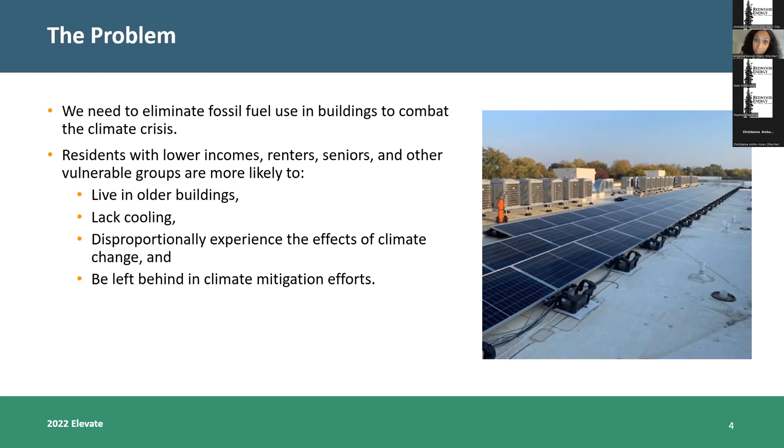As an organization, we're extremely focused on decarbonizing affordable housing, but making sure we're doing it in a way that does not increase the energy burden and increase energy poverty, quite frankly.

To do this, we developed our building electrification program about two years ago. This program provides a service delivery model for affordable housing owners to implement electrification upgrades with grant support and leveraging any available utility or public funding. The program is really designed to replace fossil fuel using equipment with cleaner technologies, create a healthier living environment, add cooling to increase resident comfort, and generate savings.

So far, we've been able to upgrade 100 units, and we have about 500 more in the pipeline.

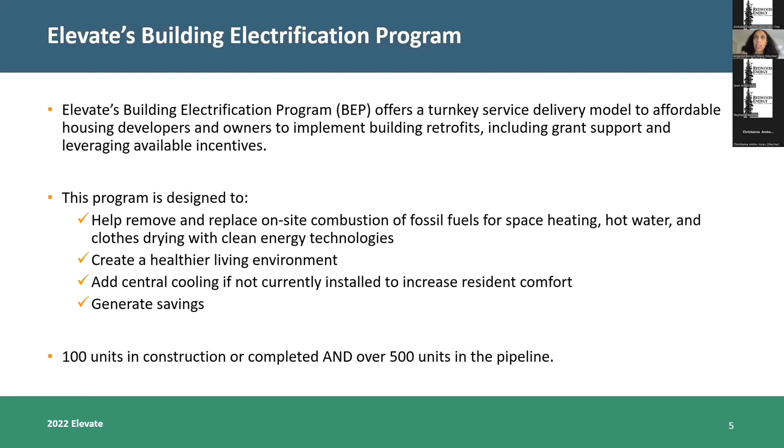This program is really about bringing together all the pieces for an affordable housing owner. Starting with our internal technical expertise at Elevate to complete the feasibility analysis and assessments of the building, we then bring in engineers for the design of the systems and equipment, manufacturers and distributors and contractors to source and install the equipment, and then a wide variety of funders and funding mechanisms to cover the cost.

I just saw a question in the chat about affordable housing. By that I mean both subsidized — Section 8, low-income housing tax credits — as well as a lot of unsubsidized affordable housing. It's inherently affordable because of the market rates, or the owners are actually keeping the rents lower. Just wanted to touch on that question.

And just to quickly answer this other question, we do actually work closely with Emerald Cities and their contractor development programs, which do have a focus on high road contractors. So I would say not everywhere, but in a lot of the areas we do work.

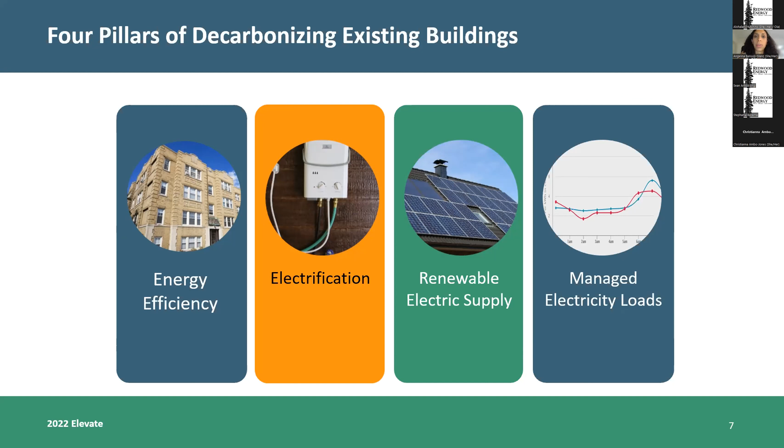Before I dive into the case studies, I want to present this visual of how we think about the process of decarbonizing buildings: first focusing on efficiency of the building systems and envelope, then moving toward electrification, adding renewables, and exploring opportunities to transition to dynamic rates, whether time of use or other rate structures offered by the utility.

So with that, I'm going to delve into our first case study, in Chicago. It's a 3-building property with 44 units, built in the 1920s, which is pretty characteristic of the multifamily stock in Chicago. This property has in-unit furnaces and central domestic hot water heaters. It primarily serves Latinx families. 70% of the units are affordable to families at 50% of area median income, and the remaining 30% are affordable to families earning 30% of area median income.

It's important to note that about half of the residents reported utilizing utility bill assistance programs, like low-income home energy assistance programs such as LIHEAP.

Another key piece of this property is that the owner is Bickerdike Redevelopment Corp, a nonprofit heavily invested in their properties. They hold their properties for the long term and are very focused on providing high quality housing for their residents and making efficiency and electrification upgrades. All of these factors are really important because multifamily electrification, especially in the Midwest, is truly in its infancy. So this was the first building we selected to go through the program, for these reasons.

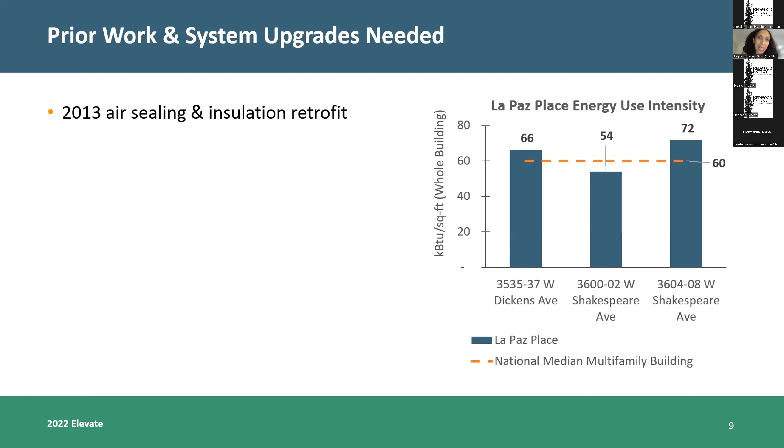Going back to our framework of efficiency first, we selected this property because the roof cavity was air sealed and insulated back in 2013 through our efficiency program. As you can see on the chart, these buildings have an energy use intensity within the ballpark of the national median, which is pretty good given their age and the cold climate they're in. We also selected this property because it has existing furnaces, and that existing ductwork enabled us to add ducted air source heat pumps, taking advantage of the existing distribution system rather than having to redesign or add ductwork. And of course, cooling.

These residents were relying on old, inefficient window units, so this was really a nice opportunity to provide cooling.

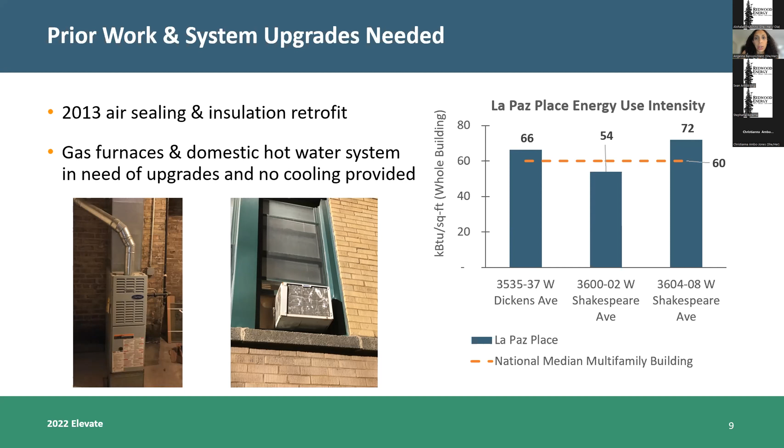To give you a sense of the full electrification scope: we installed ducted cold climate air source heat pumps, and only 10 of the units actually required backup electric resistance heat based on our models. This did add cooling for the residents, which was wonderful. We replaced the central gas water heaters with several heat pump water heaters designed in parallel, replaced the in-unit gas stoves with electric stoves, which helped improve indoor air quality, and replaced the common area dryers with electric resistance dryers.

Based on our analysis, we found that 4 units could potentially see an increase in cost, and the owner would also see an increase in cost. So to minimize this cost increase, we actually included a 70 kW solar PV array in the design.

Just a quick note on electric service upgrades, since that's always a topic folks want to know more about: most of the units actually did not require a panel upgrade. The units that had to have the backup electric resistance heat did need a panel upgrade, and the owner's panel also required an upgrade to accommodate the dryers and heat pumps.

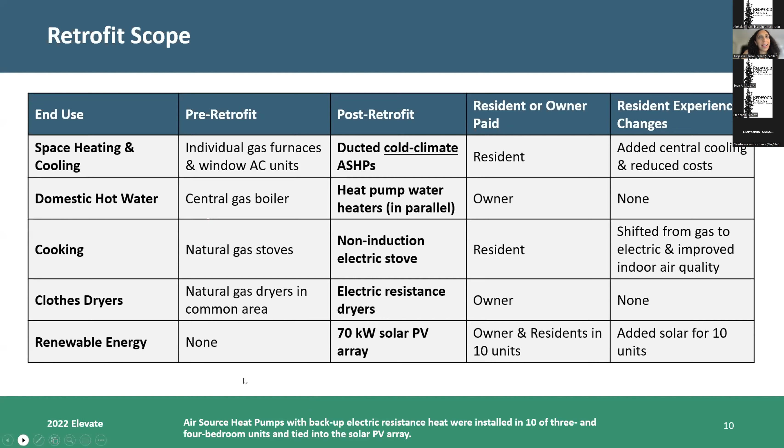Just to touch on the utility bill analysis, overall residents were anticipated to save 21%. Costs were expected to be a little bit higher in January, just due to the price of electricity and heating. We installed solar to offset any increases in costs in the 4 units that we projected to see an increase, and of course the owner.

So after the solar, we really are looking at savings for all parties in the property, which is really important. We did not actually replace any windows and doors in this property. We had previously focused on the attic air sealing and insulation.

Did the residents pay for the stoves? The residents did not pay for the stoves. The stoves were actually included in the total project costs that was paid by the owner and grants and other means.

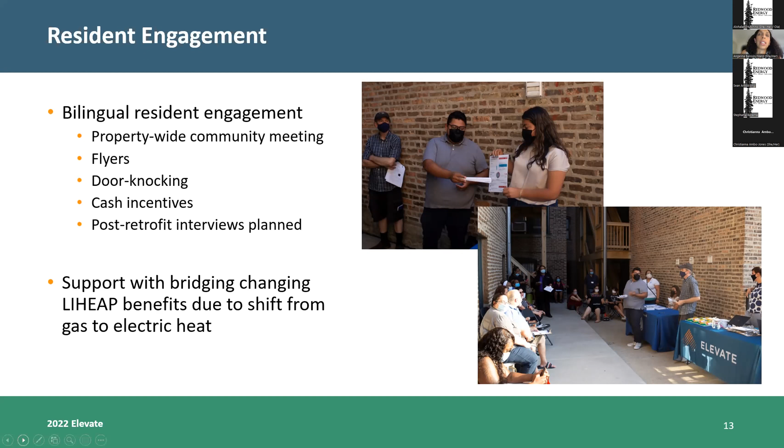So just wanted to touch on that. I think that's what really made this property and this project special, was the deep resident engagement, which is so critical. In addition to that, we actually are doing pre and post upgrade monitoring of a handful of the units, just to understand what the impact on indoor air quality is, and also drill down a bit more into the end use and the electric use of each piece of equipment.

Keeping in mind the time, did the rents go up for the residents post retrofit? They did not, to my knowledge, but I will go back and ask to confirm. But this was something that was really important. We're really trying not to see any additional burdens be placed on residents.

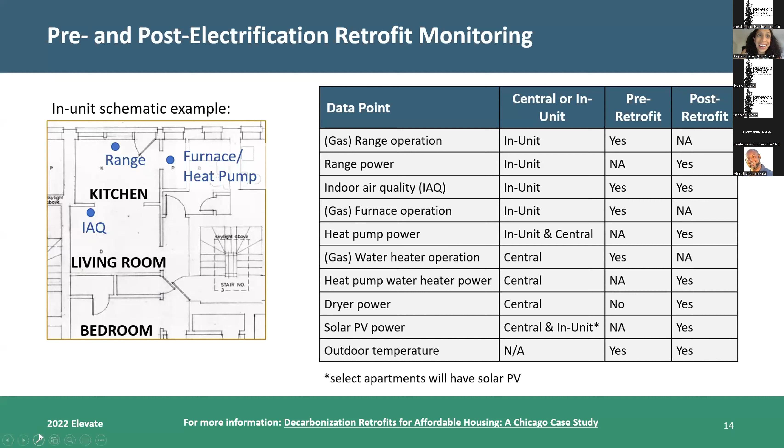The next case study I wanted to share is a project in the Madison area of Wisconsin that we're in the process of designing. This property was built in 1982 and has 4 buildings, 3 of which are apartments and one is townhomes. It's project-based Section 8, so rents are affordable to residents at less than 50% of area median income. It's also important to note that residents pay for both electricity and gas at this property.

From an efficiency-first framework, we took a look at the energy use intensity of the 4 buildings on the property and identified that the townhomes were the most efficient, and that's where we wanted to start. This picture at the bottom of the page is of those townhomes.

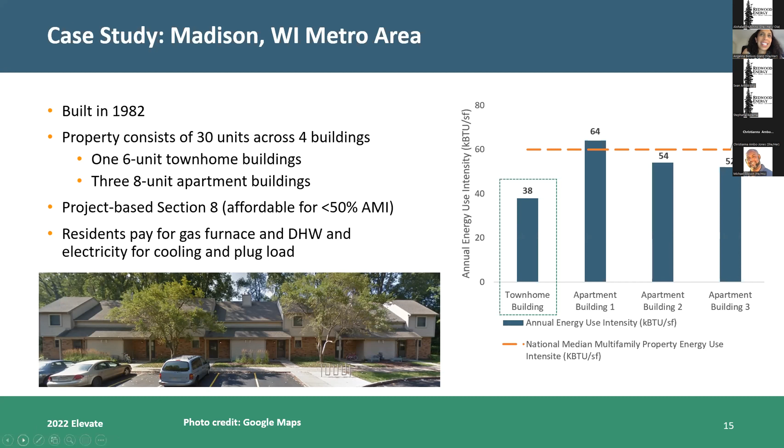In terms of electrification scope, these townhomes have furnaces, so it's a perfect opportunity to install ducted cold climate air source heat pumps. They also have individual hot water heaters, so we'll be installing heat pump water heaters and smart thermostats. I'm not sure about the stoves in this property—I think they're actually electric already, but I can follow up if anybody wants to delve deeper into that.

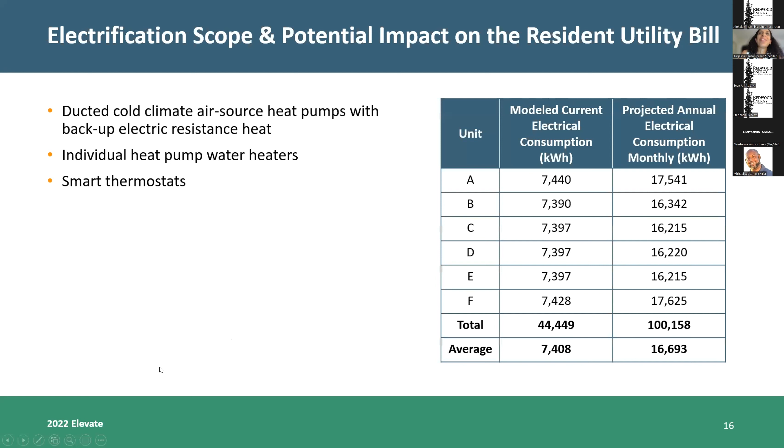As we started looking at the potential impacts of electrification across the units in these townhomes, we found that electric use was going to increase pretty significantly, and it was not going to be offset by the gas bill savings. In fact, residents would experience an average $800 increase in their energy costs over the year. Given our focus on residents and equity, that was not acceptable to us.

So we really set out to determine the best strategy to offset this increase in cost.

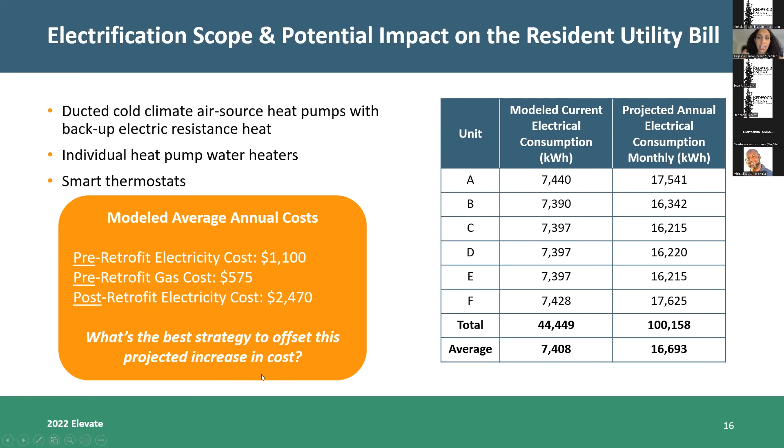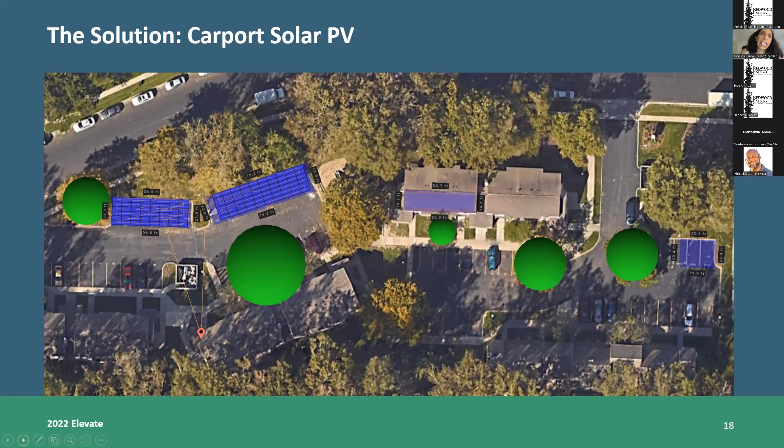So what we came up with was installing carport solar in these open, unshaded areas of the parking lot. This is the first time we're really looking at a carport solar array on a property in the Midwest. Here's a bit more about the solar design we're developing and planning to move forward with.

It's about 43 kW in terms of system size, and this will fully cover the increase in electricity usage across the 6 townhomes.

I wanted to share this because this owner is a nonprofit very concerned about their residents—we're actually going to install a common electric meter for the solar to tie into, and we're also going to tie in the residents' air source heat pumps and heat pump water heaters.

So in actuality, the residents will only be paying for their plug load. This will enable the owner to absorb any month-to-month variations in electricity use and cost, as well as solar production. It's kind of an innovative approach, shall we say, to make sure residents aren't going to experience significantly higher bills.

The owner was also very interested in adding battery storage to this property to keep these units online in the event of an outage. This is really a pilot for this owner, and something they're considering doing more broadly across their portfolio.

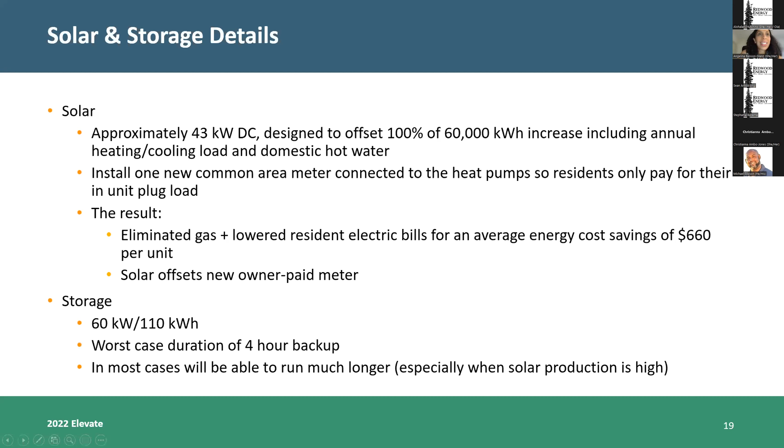For the last case study, a very short one, just a different perspective. At Elevate, we work across the Midwest and the West Coast, and the Pacific Northwest is a very different region and actually has a lot of all-electric buildings already. So this case study is less about fuel switching and more about an interesting strategy we used when installing the heat pumps.

This property is 50 units, townhome style. It underwent a rehab a couple years ago, making efficiency improvements around attic insulation, wall insulation, window and door replacement, LEDs, low flow water fixtures, energy recovery ventilation in unit, and heat pump water heaters. It's important to note the owner wanted to keep the electric resistance space heating, which is a bit of a challenge or barrier we're experiencing in the Pacific Northwest.

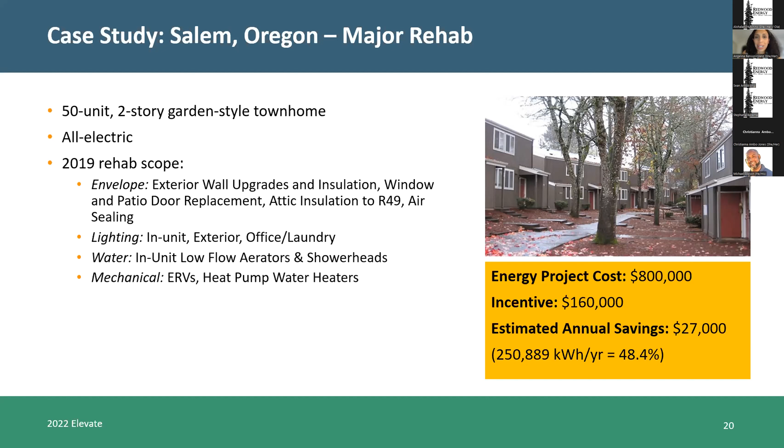But just to touch on the heat pump water heaters—we actually installed them outside of the thermal envelope, in a closet off the patio, and the water heater exhaust was ducted through the roof.

There was a louvered door on the closet to provide outdoor air. This installation strategy separated out any interactive effects between the domestic hot water and the HVAC system, which was a unique strategy because that's something we often worry about when installing heat pump water heaters in units—them pulling conditioned air. This is particularly challenging in the winter.

So this approach actually is saving residents about $250 a month, or a year.

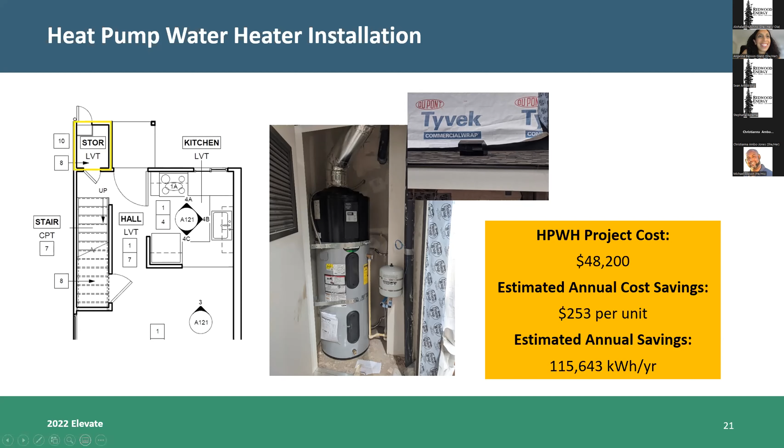With that, I wanted to wrap up and touch on some of our learnings. Owners need support to figure out the best solutions, and that's what we strive to do through our programs. The owners we work with are very focused on their tenants and also operating cost, but we've found that adding cooling, resiliency, and the health benefits of electrification are definitely of interest to owners and especially to residents.

I would also say the regional differences for us, like between the Midwest and Pacific Northwest, are very real in terms of the economics, technology solutions, contractor knowledge, and availability. And doing this electrification in affordable housing requires braiding of funds, especially making sure you get the efficiency done first, and then moving into the electrification and the renewables.

The policy gaps are incredibly real, and there are opportunities. With the Inflation Reduction Act there's more funding coming, but the focus on finding funding for service upgrades, as well as addressing the LIHEAP benefit issue I mentioned earlier, those need to be addressed. Utility rate structures are also an opportunity in a lot of areas, making sure electric heating rates are re-examined so they don't limit the reasons people aren't making the switch. And investments in a diverse workforce and contractors is incredibly important to make sure nobody's left behind. So while this is complex, it can be done, and it can be done right.

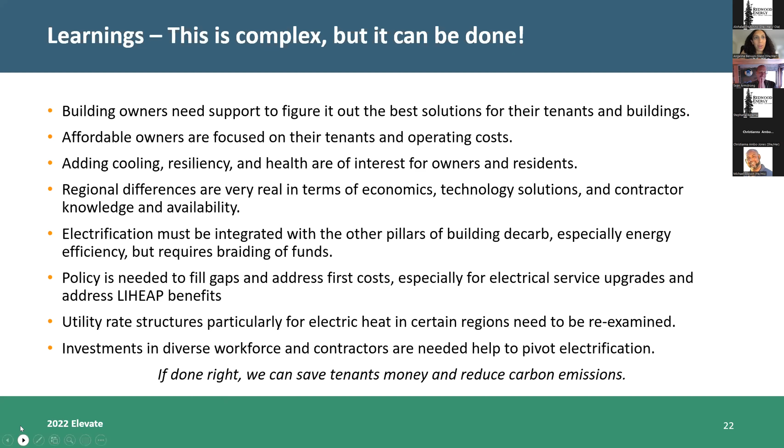I have 2 minutes and there are 21 messages in the chat, so I don't know, Sean, maybe you can help me out. Yay! I think there's some people who want you to post things—those are in there.

Ann Harvey asked, are the parking lot solar arrays using the space over the apartment buildings' parking lots? What about the possible future weatherization and decarbonization of the apartments? A number of people are asking, are you doing the insulation, are you doing the weatherization first?

Yeah, that's a really good question. I think we're utilizing the space on the property that is currently available, but it does beg the question of what happens when we start to address the other three buildings on the property. Unfortunately, I don't have a good answer yet. I'll say the other three buildings on the property are less shaded, so I think we can explore rooftop solar there. But these are the real things we're grappling with.

Ian Tran was asking if your company has encountered really tricky cases—what is the most challenging case in that line of inquiry? This seems to be challenging; do you have anything more?

I think what we're finding is that we really have to dig into each property and figure out the solution for that property. With each solution we're encountering challenges like supply chain, which is very much a challenge, and finding contractors comfortable doing heat pump installations is really a challenge we're finding. So as an organization we're also trying to invest in workforce and contractor development. But getting the utilities involved is, in some cases, easier. So there are challenges at every turn of this process, but they can be overcome. I want to deliver that optimistic message: we can do this, we can do this together.